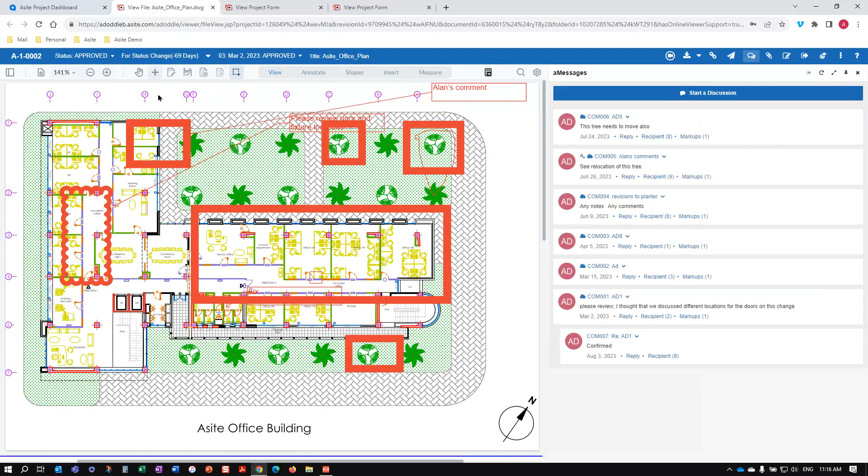Now this one's got a lot of markup - I kind of made it messy on purpose, but you can see that within this, the DWG has already been converted in our viewer and allows us to do the markup. So being able to come in and add markups as appropriate, I can annotate, add shapes, whatever the case may be, directly on the drawing or within the collaboration as we're moving this through the various constituents involved in reviewing this particular document.

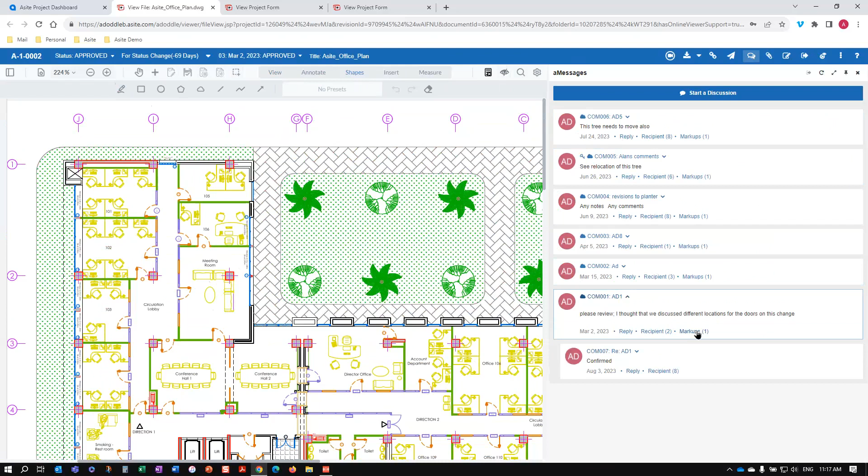What you saw on the right-hand side were the comments made around the markups of the drawings. So if I clear this real quick, I can highlight one specific markup and see that there was a question regarding the different locations for the doors in this configuration where we changed the plan, did a call out, and assigned it to a number of recipients. There's already been a response logged where, in my case, I confirmed that these changes were correct so it can move forward in the workflow.

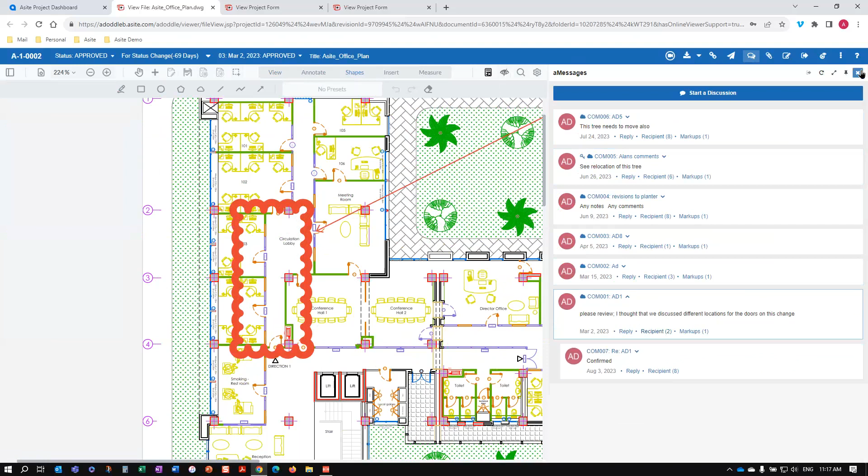So markups, visibility of proprietary file types, managing all the collaboration and discussion around the document. As indicated, similar to what we saw on the form side, we can move these through various approval stage gates, depending on how you want those configured. This was assigned for status changes, showing how long ago that was assigned, whatever the case may be - I can see all of that within the status area here. We're also a full document revision system, so we can handle multiple revisions, and we store all of those within the relationship to the file.

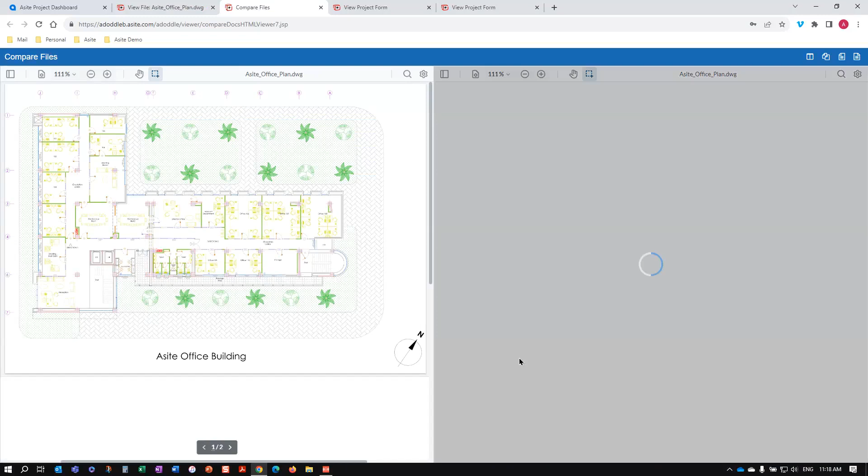At any given time, I can compare the existing or current version with the original version. If I was familiar with this project, I would know what changes we've made, including expanding this conference room for the client and changing the configuration of the hallway from the original example.

Doing something as simple as an overlay really allows people to see where the changes have been made in a particular document or drawing, and this can all be handled directly on the platform.

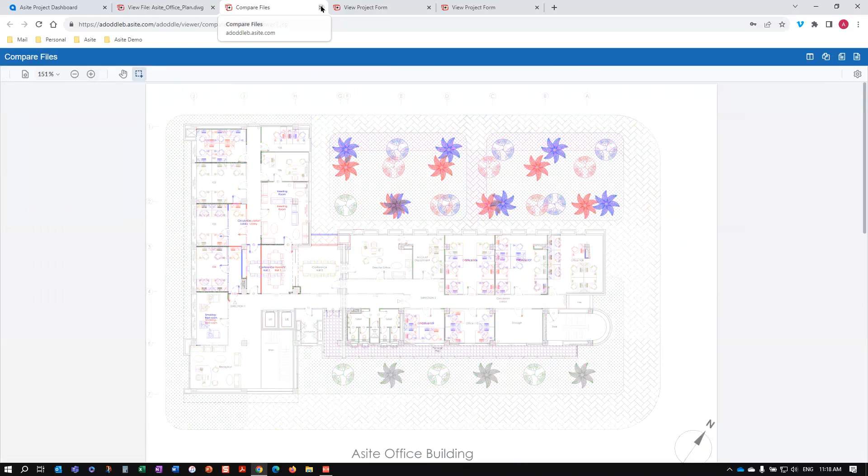Last but not least, in addition to comparing files, we have the ability to distribute either manually or through defined workflows. One of the strengths of Asite is our ability to configure and design any number of workflows for distribution and interaction with documents. We can define user tasks, system tasks, and set triggers so things are sent and notified to users for action.

The right information to the right people at the right time for the appropriate action is what Asite's designed to do, and the workflow helps automate that. Certainly you can do ad hoc distributions as required, but the automation and consistency within the workflows your organization defines is an area we find critical for our customers and a real differentiator for the Asite platform.

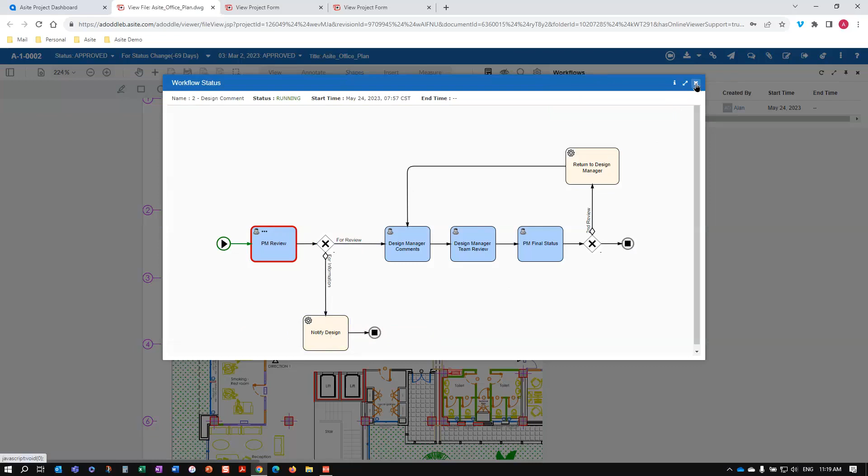That really takes us through file management. There's a lot of features and capabilities here, but this was just meant to give an introduction. As we saw before at the dashboard level, all of those tasks—I've got 4 drawings that need my action. We do the same thing with submittals.

On the submittal side, any document—you can see the folders here organizing the electronic assets in the way that I choose. These folder structures are completely configurable. Your organization gets to decide based on each project, or we also set up project templates that allow these pre-configured folder structures to be applied to each project.

If we look at something like a submittal, I'll pull one up here on this package unit. We can see the document that's been submitted, and we can see any of the information.

It can go through workflow, and it can have markups with it. So not just drawings, but any electronic asset that you're managing on the platform can use the same tools within the files area of our application.

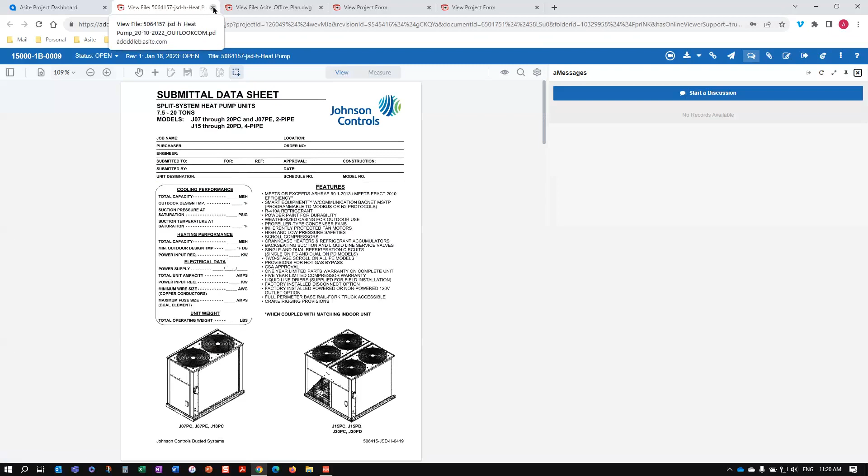As we move from this, I'd like to go to our mobile area and give you a quick introduction. We run Asite in a true mobile application—this is installed on my iPad as an iOS app.

Same capabilities that I had before on the browser side. This is an area I find crucial—I've worked with a lot of project management systems, and often the mobile application doesn't give you the same capabilities as the native web-based application. In the case of Asite, that is not true; we have all the same functionality.

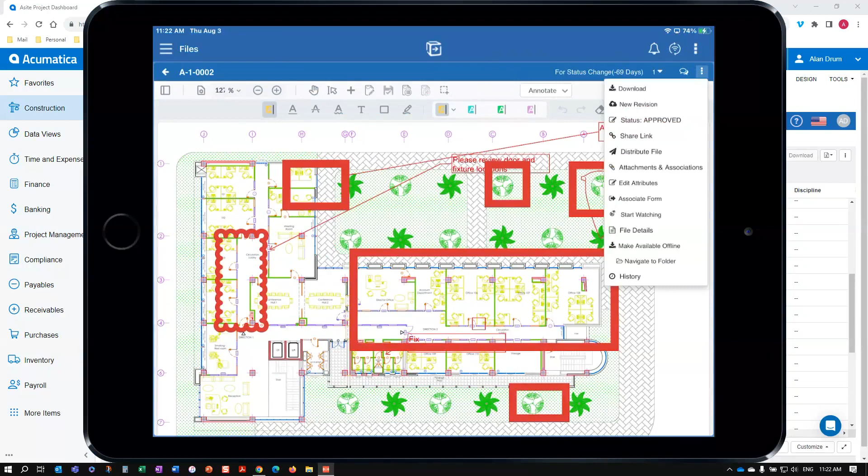All of that is available within the platform here on the mobile device. So with that, a couple of specialized things we do on the mobile side that expand, really for field activities, and things like quality. So when I look at quality, I'm able to define around this change for the business center that we were working on.

I'm able to change or set up pre-configured steps or stages that can follow a very specific quality plan. It means I can set up those forms in a sequence so that my users in the field know what they're supposed to fill out. Those can be checklists, inspections, whatever you define. So in this case, if I go to it, it's going to open up yet another more specialized form that we have standard within Asite, and that is what we call our checklist.

So this one was an inspection, basically to look at the wallboard, the sheetrock that's being installed - pass, fail, all the different pieces. But you get to design and configure the steps, the areas, the stages, and the items that you wish for users to confirm have passed inspection.

So that's just a quick example of one of the inspection forms that we do. Again, we've lined out, I've got a first QA, I've got a secondary MEP where the rough-in's been done, and then we're going to close up the walls, and I want to make sure everything's correct, and then we're going to get an update from there. So that's just one way you can utilize the forms on the platform to drive a business process.

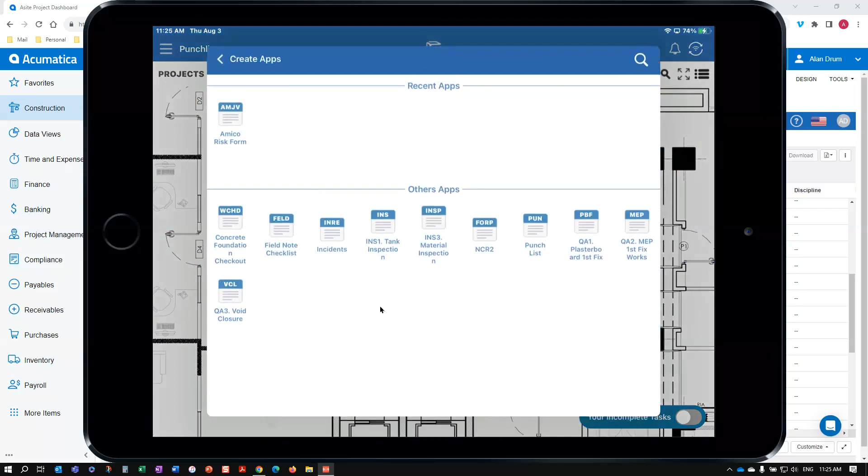And again, it's really easy on the user interface to raise any forms that we configure. So whatever forms are appropriate for this project can all be configured to be raised directly within the punch list area of the application.

All right, so just taking you back - and I know we're moving pretty quickly, but hopefully that gives you some indication of the capabilities of extending the functionality that I had already shown, being able to do it in mobile.

But as we look back, it's important to note that all of the data that we're managing in Asite is able to be viewed and accessed from within Acumatica, as I'm doing here. You could also obviously access it without being logged into Acumatica. So in contrast, I'm logged in directly to Asite - same view.

And again, this is likely more appropriate for a third-party constituent - a subcontractor is going to come into the application without having to come through Acumatica. That's really one of the key design aspects of our integration: allowing the appropriate personnel to access the data where it makes the most sense.

And so with that, you've seen a couple of these examples as I've gone along with the way that we've done the dashboards. We've configured those. Again, there's no limit to the number of dashboards that can be configured. They're all built with what we call gadgets, that allow for favorites and shortcuts, showing recent updates, filters - things of that nature. One I like is this filter. So imagine all of that data we were collecting in the forms, or even metadata we have against documents, being able to look at those RFIs with a potential cost impact.